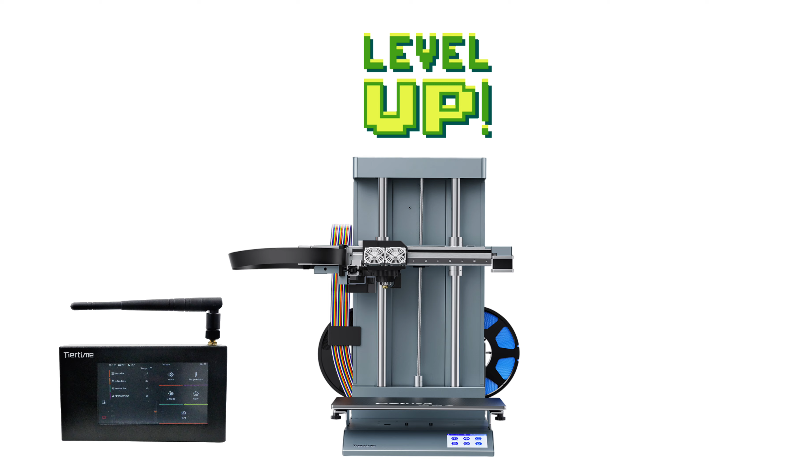Cetus2 has recently received a new upgrade, bringing new accessories, a Wand server, and support for the open-source software OrcaSlicer, along with a big upgrade in performance. Let's take a look.

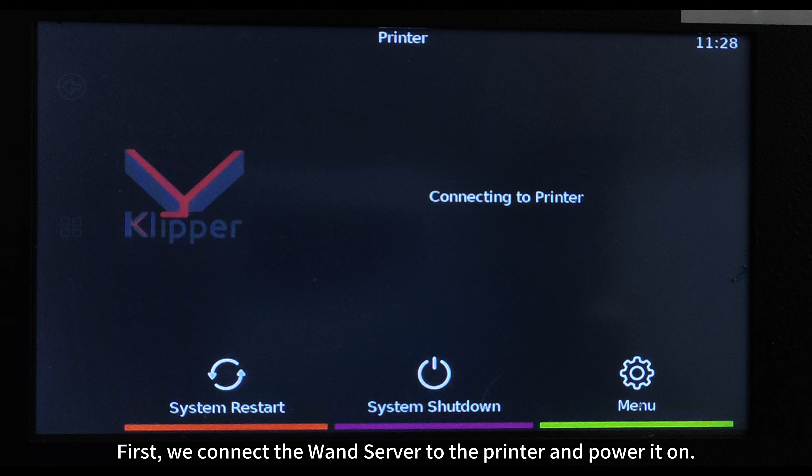First, we connect the Wand server to the printer and power it on. When the Wand server is connected to a Cetus2 with a new motherboard, it will boot the new system.

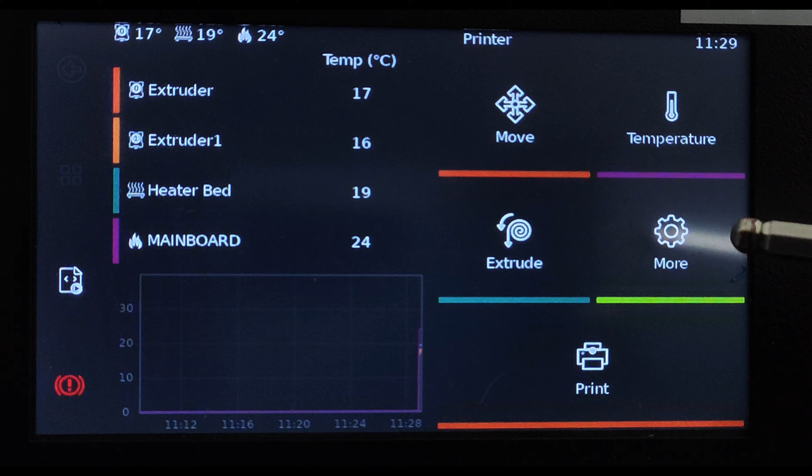Connect the Wand server to the same Wi-Fi as your computer and make a note of the IP address. If the IP address is not displayed after connecting to Wi-Fi, restart the Wand server to recover.

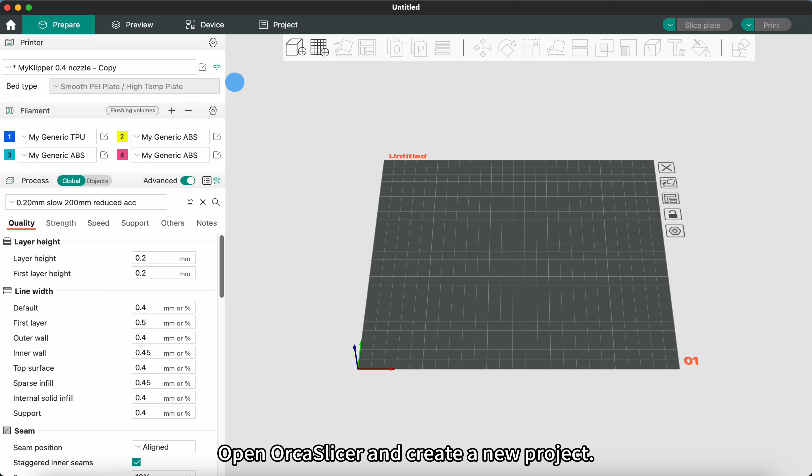Open OrcaSlicer and create a new project. Import the 3 presets we uploaded.

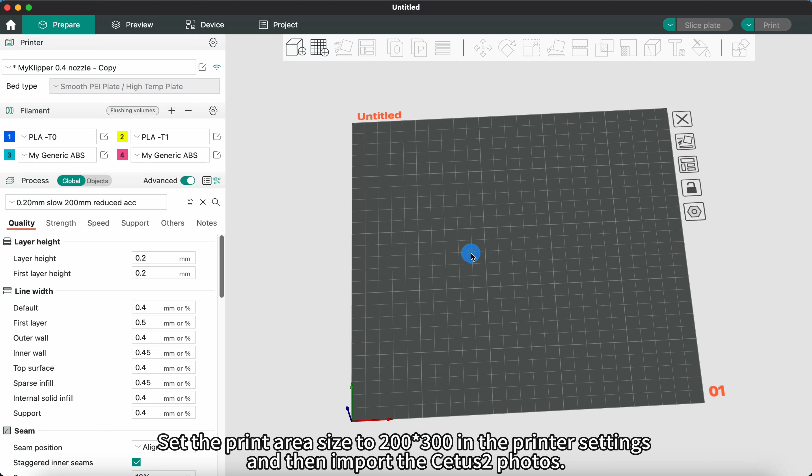After importing the preset, replace the first and second materials with our preset materials. Set the print area size to 200 by 300 in the printer settings, then import the Cetus2 photos.

Now let's understand the meaning of the specific code. Once connected, you can upload and print the model directly.

If you change the number of isprobe equals 0, isbedmesh equals 0, to 1, it will do print head alignment and leveling before each printing. Isprobe is for height, and isbedmesh is for leveling.

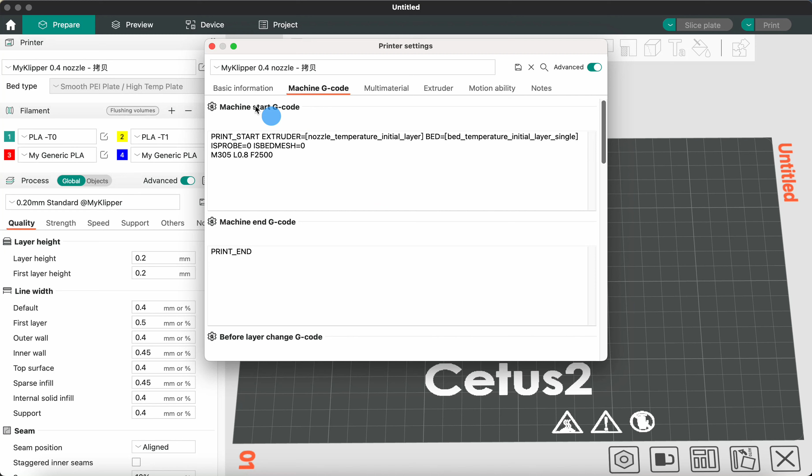The number after T is the number of the nozzle. The third line of the code sets the parameters for the pressure advance.

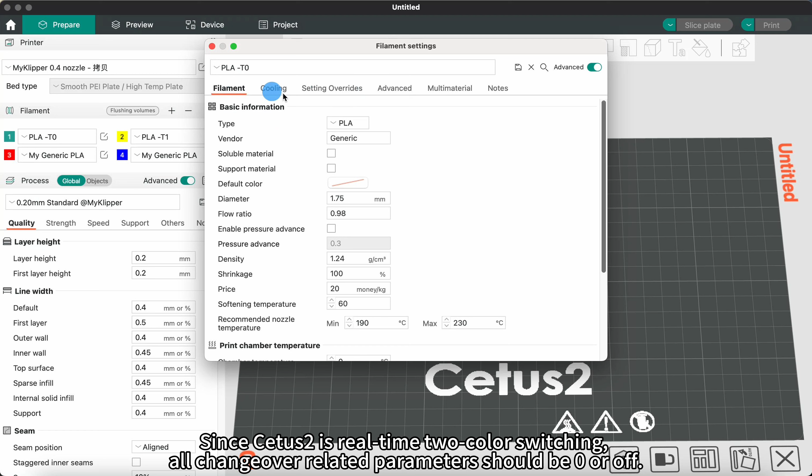Caution: activating the pressure advance in the setup results in an error and can only be set by code. Since Cetus2 uses real-time 2-color switching, all changeover-related parameters should be set to 0 or off.

Close the ramming parameters. These 3 parameters also need to be changed to 0 seconds.

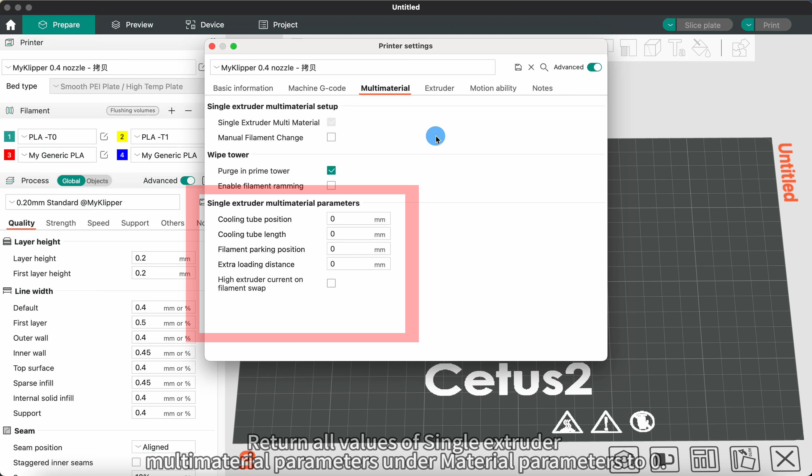Return all values of single extruder multi-material parameters under material parameters to 0. Change the value under retraction when switching material to 0.

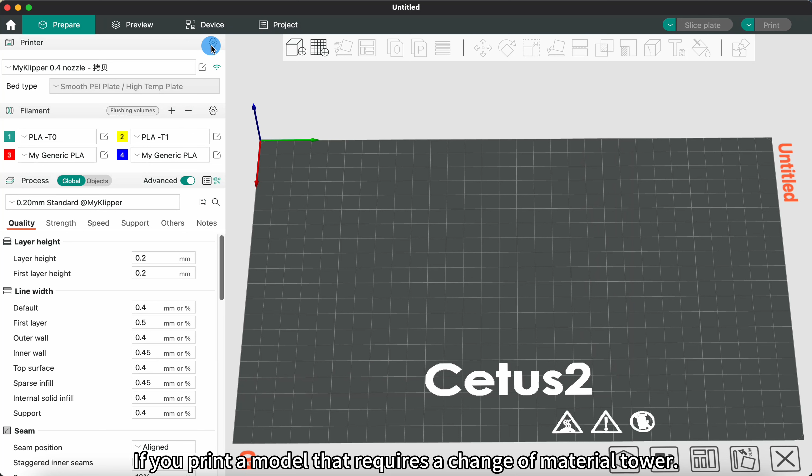If you print a model that requires a change of material tower, first change the flushing volumes parameter to 5. Then, from the material parameter here, change the value of minimal purge on wipe tower to 5.

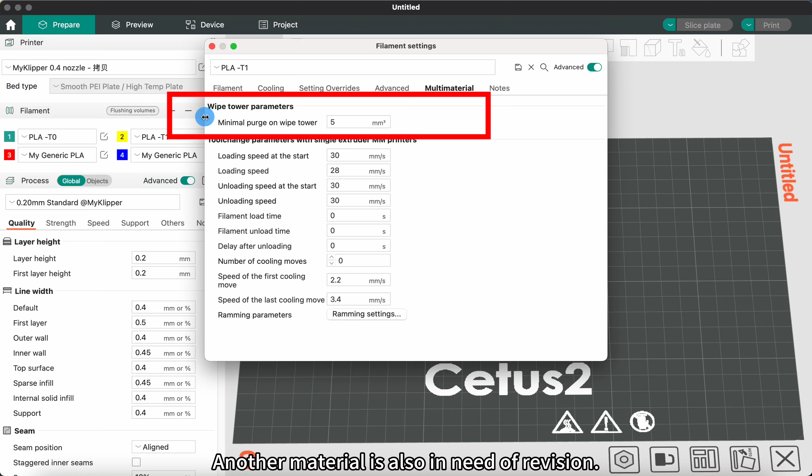Another material is also in need of revision. Let's import a model to try out 2-color printing and see the effects.

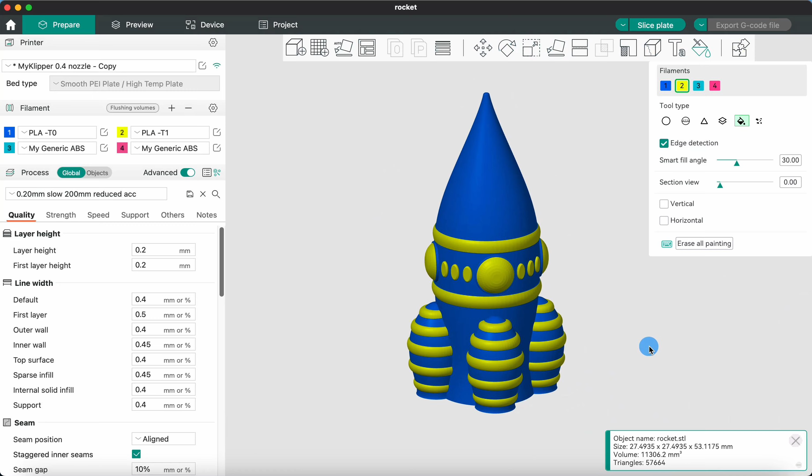Colorize the model. Import a submodel and change the size and material.

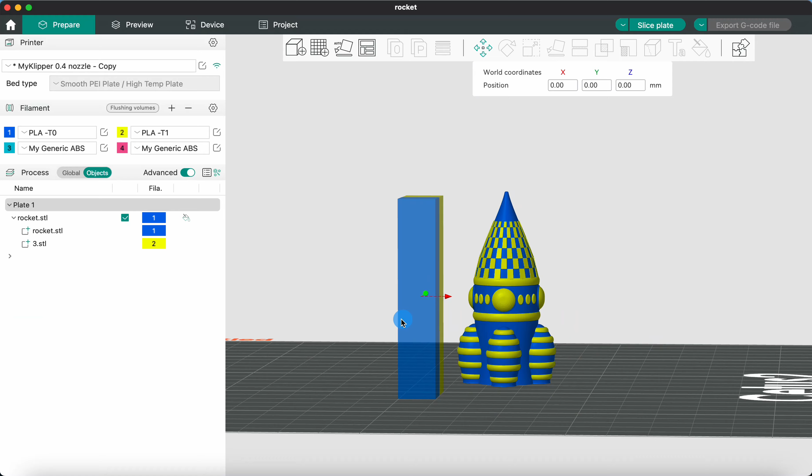Slice the model to see the effect.

Next, let's connect the 3D printer.

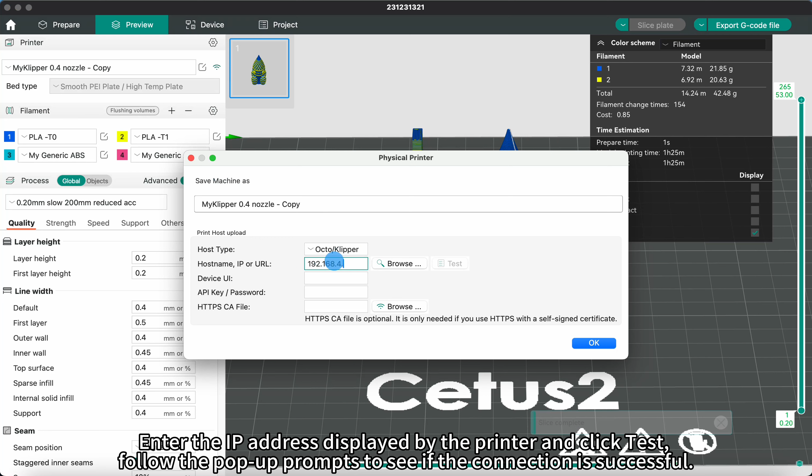Enter the IP address displayed by the printer and click Test. Follow the pop-up prompts to see if the connection is successful.

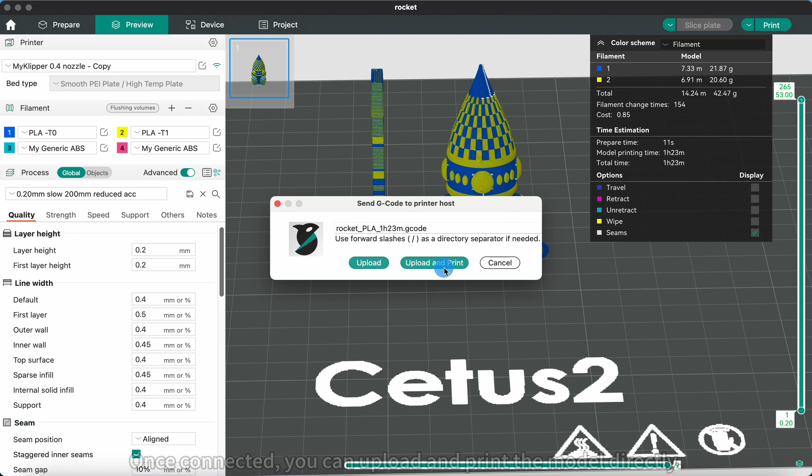Once connected, you can upload and print the model directly, and you can view real-time print status in the software.